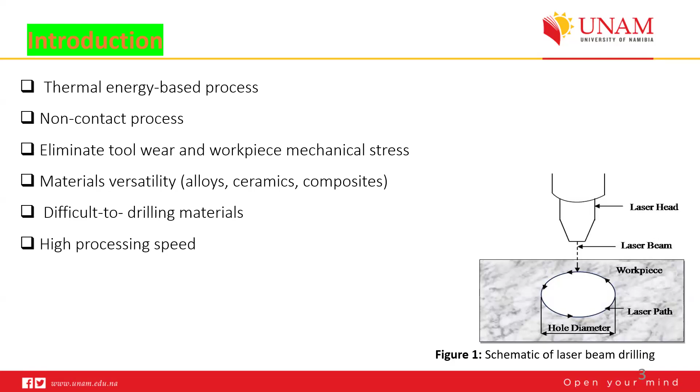So Dr. Hulas, are we following? Your voice is clear, sir. Please proceed, sir. Yes, sir. Okay, thank you so much, sir.

Okay. Now coming to the next, process parameters and the quality characteristics. So as we know, the performance and the quality of a laser beam drilling process are determined by several input process parameters and quality characteristics. So what are the key input process parameters that affect the quality, or the output parameter or response, of a laser beam drilled hole? These parameters are laser power, pulse frequency, drilling speed, assist gas, type of the assist gas and its pressure, pulse duration, beam diameter.

So first, what is laser power? Laser power means how much energy is delivered by the laser per unit time. That we call the laser power. And then the pulse frequency means the number of laser pulses per second. That is the laser pulse frequency, and it also depends on the type of laser we are using, like a continuous wave or pulsed mode laser.

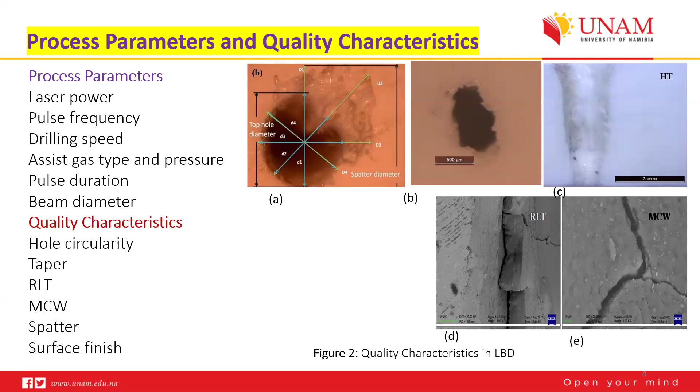So as I said, laser drilling has many advantages, but several technical challenges remain, such as the selection and optimization of process parameters. Selecting and optimizing the process parameters for laser drilling, particularly for a specified material with a precise hole geometry, is still a challenge. And again, when the number of process parameters increases, their non-linear interactions make this process complex.

Because in current industrial applications, as I said, advanced technological industries are looking for precisely drilled holes. For example, heat exchangers, machine tools, sleeves require a smaller hole diameter with a high aspect ratio and very close tolerances. But as I said in a previous slide, and I showed some figures, the current traditional laser beam drilling process cannot meet these demands. Therefore, we have to look for another particular process.

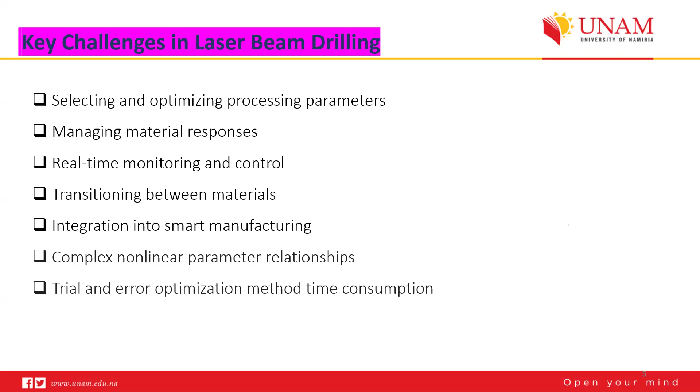So these are some basic challenges in a laser beam drilling system, like complex non-linear parameter relationships. When the number of parameters increases, they form a non-linear or complex relationship between the input and the output. And our conventional optimization techniques do not have that much capability, or they have their own limitations for predicting the process parameter range and an optimum set of input parameters for quality. And they are also more time-consuming techniques.

Then moving to the next, that is the main topic of this talk or presentation: the application of artificial neural networks in laser beam drilling systems. So now to overcome these challenges that I have mentioned, a traditional laser beam drilling system faces a lot of challenges in establishing a mathematical relationship between input process parameters and the quality characteristics with traditional mathematical or regression models, like response surface methodology or the Taguchi experimental design method.

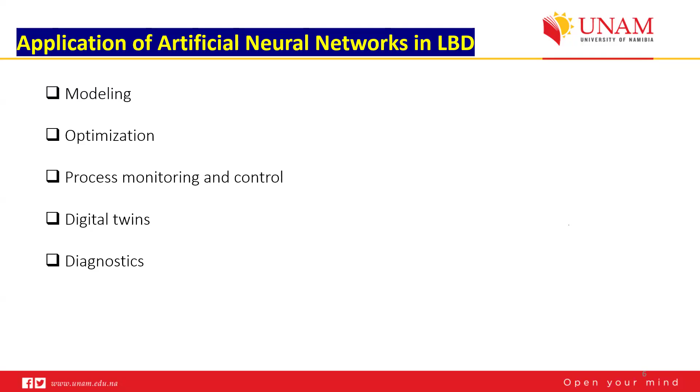Any question, sir? Otherwise I can move to the next slide. Yes, sir, we are here. You can take any question from the chat. If there is any question from the participants, we can discuss before moving to the next slide. Mr. Dushyant Pawar wants to ask one question. Pawar sir, you can ask, or write in the chat box. He is not available, please proceed. Dushyant Pawar sir, I have unmuted you. Now it's fine, sir. Yes, sir, please.

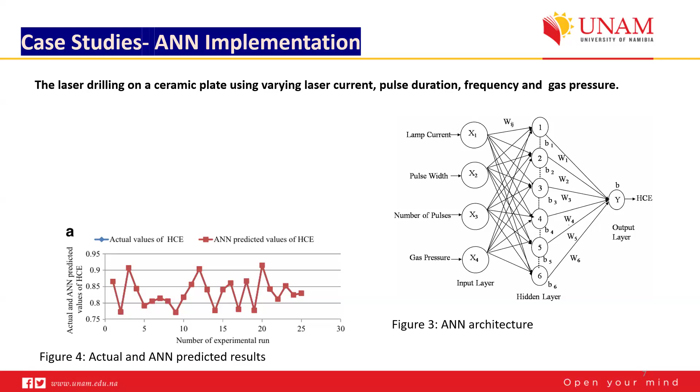So basically this is the ANN architecture, and the predicted values were compared with the actual values. Then figure 5 shows the basic implementation steps. Using MATLAB, you can also perform this artificial neural network.

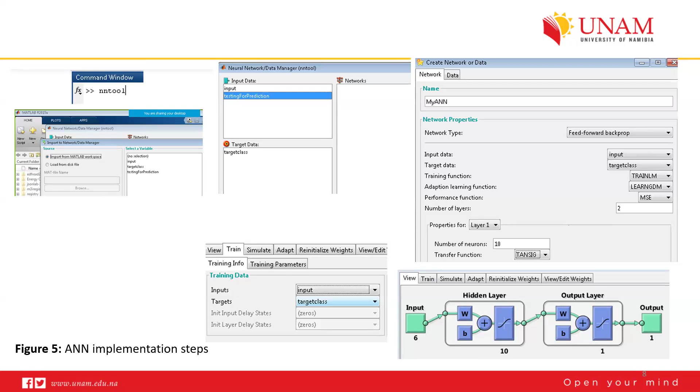Artificial neural network for a particular problem, and then you can predict the range, or you can predict the setting of an input process parameter for a particular application.

And before the conclusion, I want to mention one more thing: the accuracy of the ANN model or the ANN tool is much higher than the conventional modeling tools. Here you can achieve model accuracy of more than 95%, and sometimes literature studies reveal that artificial neural networks can give more than 99% accuracy, in comparison to conventional or traditional modeling tools.

So now let's move towards summarizing or concluding this session. As I said, laser beam drilling is a thermal energy based non-contact process which is best suitable for all types of engineering materials, including high temperature alloys or super alloys, composites, polymers, all difficult to cut materials. And the performance of this process highly depends on the control of the input process parameters.

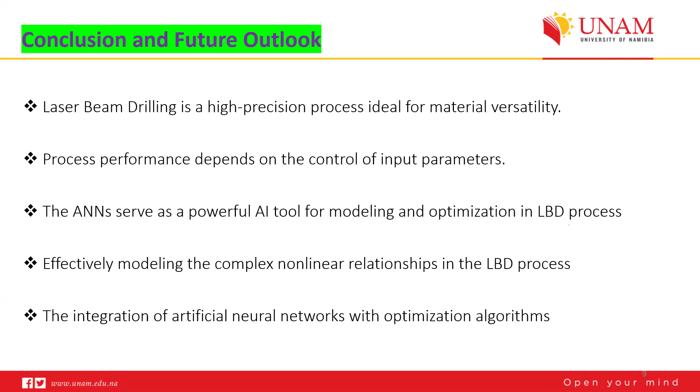So now coming to some future trends. For a manufacturing process, especially a laser beam drilling system, we can monitor or control the process parameters using sensors, as I have already mentioned. There are many smart AI tools captured in Industry 4.0 already, and they can adapt the control system.

And as I said, nowadays industry is developing hybrid models comprising more than one AI based tool, and they are also integrating the Internet of Things for Industry 4.0 applications to make a smarter manufacturing process.